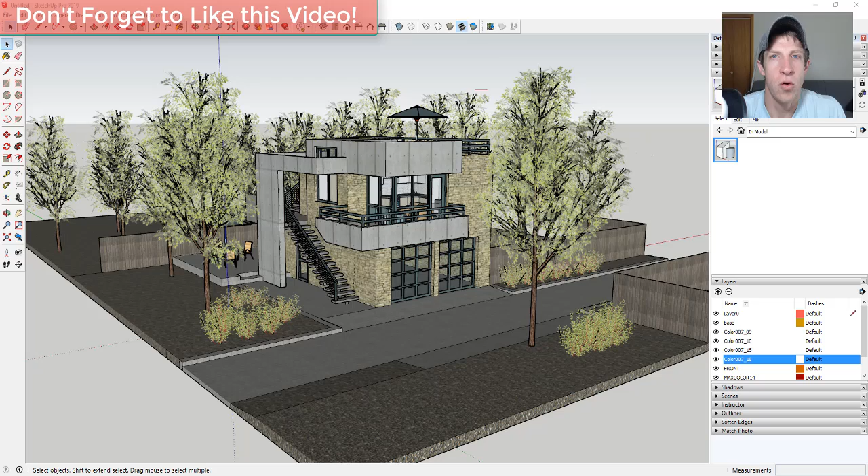In this video, I was going to take another model from the 3D Warehouse and take it over into Lumion to see what kind of rendering I could create with it in a short period of time. Let's jump into it. I found this model while doing another tutorial on my other channel, and I really liked the model and the model author and what he has in his collection.

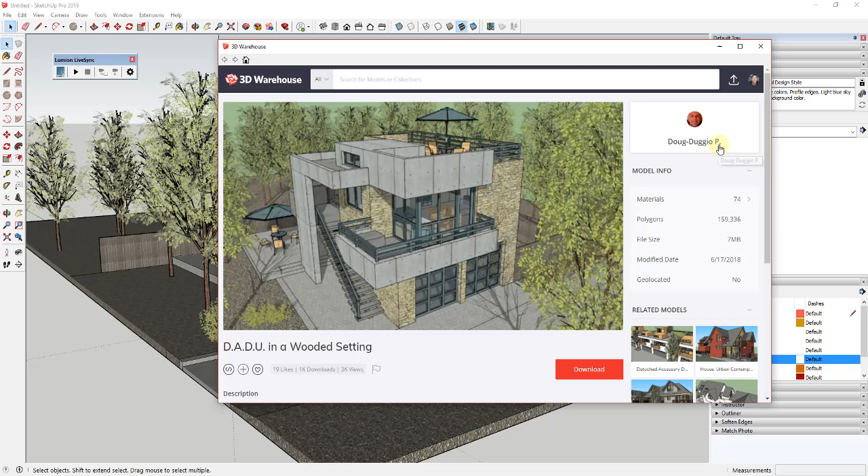All I've done is I've taken this model file, which is the DADU in a wooded setting by Doug-Duggio P. You can find that on the 3D Warehouse, and I've just brought it in as is. I thought we'd go ahead and take it into Lumion and see what we could do with it.

For now, I'm just going to use Lumion LiveSync in order to take this over there. Probably the first thing I'm going to do is turn on a faster style, or maybe just adjust this style with the profiles off so it's a little bit faster. That way flying around inside of SketchUp will be a little bit quicker. But we can go ahead for now and take this as is and send it over into Lumion.

I'm already seeing some things we're going to want to fix, but let's start by loading Lumion LiveSync, the extension, inside your model. I'll link to a video showing you how to get that. I'm just going to click the play button, and the first thing it's going to ask me to do is save my model. Once we've saved this model, we'll click the button for LiveSync.

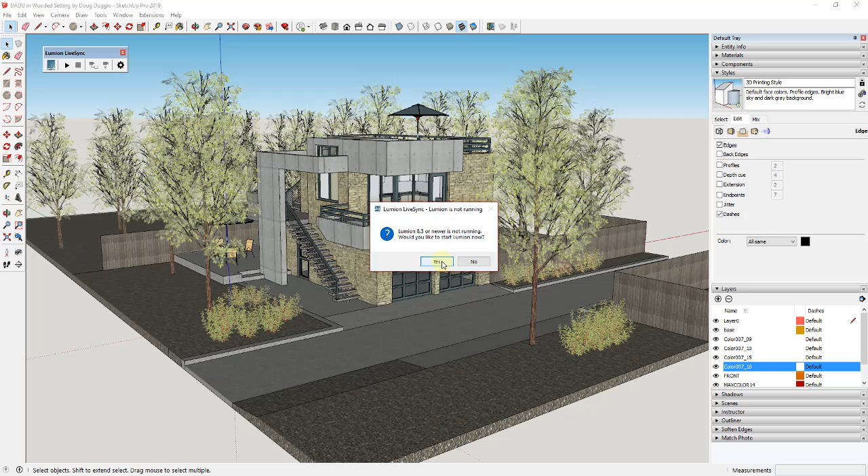Since Lumion's not running, it's going to ask if we want to start it, and we're going to say yes. I do get this question sometimes - if you do not have Lumion 8.3 or newer, you probably will not be compatible with LiveSync. But I'm just going to go ahead and click yes, and that's going to bring up Lumion.

The first thing we're going to do when this brings up Lumion is select a template file, which tells it what kind of background we want around this. I personally pretty much always pick the mountain range, just because I like having some mountains in the background as opposed to just a flat plane. You can select whichever one you want, but we'll click on mountain range for now, and that's going to load our mountain range background and load this model into our scene.

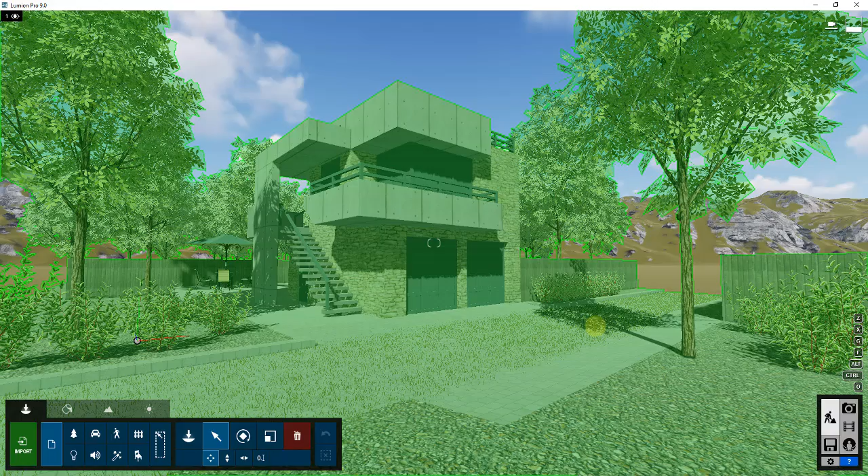So the model kind of gets dropped wherever - in this case, it got dropped over here, which is going to work just fine. When I go over here and look at this, you can see how this already looks pretty decent. There's obviously some things we need to fix and adjust, but that shouldn't be too hard to do.

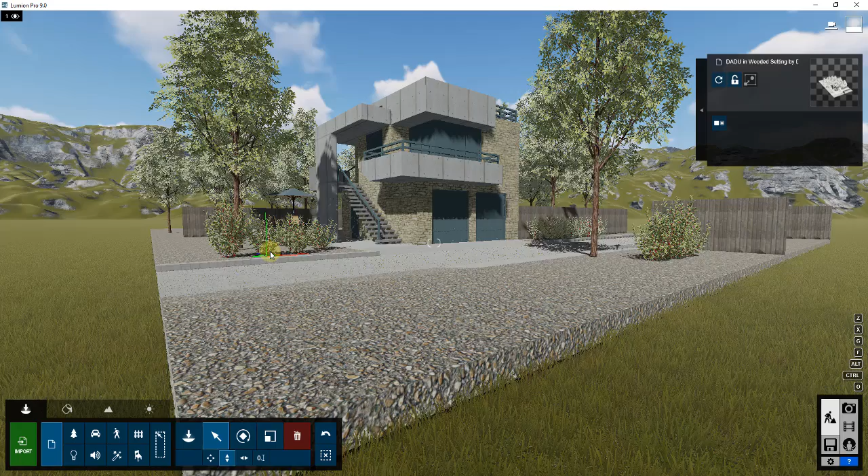One thing to note - it's not a problem in this one because there's a thick plane at the bottom, but some models, when you bring them in, you may need to move them up or down a little bit just to get them above the grass in here. In this case, we're not really worried about that - we'll come in and paint out this grass in just a second. Even the trees in this one actually look pretty good, which is kind of rare for a SketchUp model when you first bring it in.

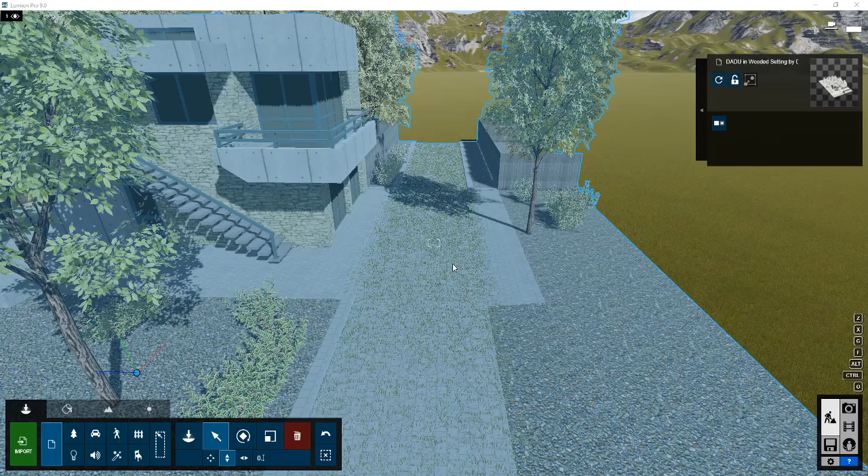What we want to do is start making some changes to make this look a little bit more realistic. The first thing I want to do is come into my landscape settings and paint out the grass that's showing up through this ground inside of Lumion. We obviously don't need the Lumion grass showing up through here.

So all we're going to do in order to get rid of that is go into the paint function, and we're just going to paint a material in this area where the grass is. We'll paint the rock material all along this face. You can see how that's really easy to do. You can adjust the brush speed and everything else, but basically what I'm doing is just painting out that grass material.

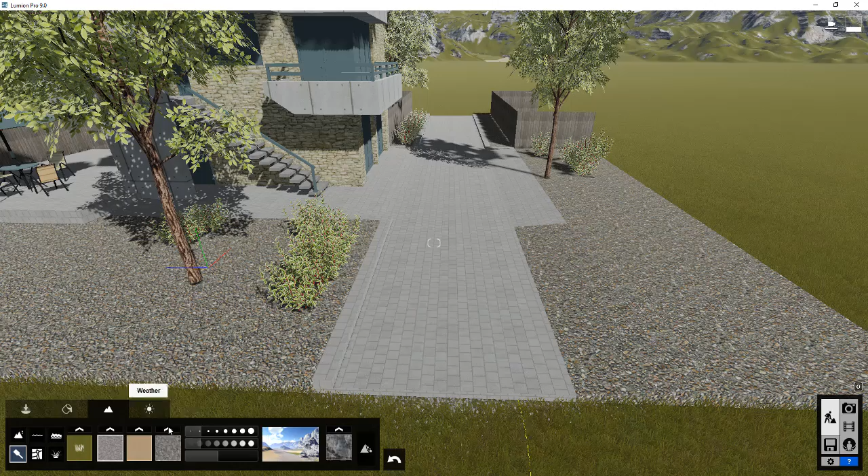If we were to hide our building, so if we take our building inside of SketchUp and Lumion and put it on a layer and turn it off, let's go ahead and do that. So if we select our building, place it on this layer, which is already on this layer, and turn that off, you can see how we just painted out a circle of material so our grass isn't showing through.

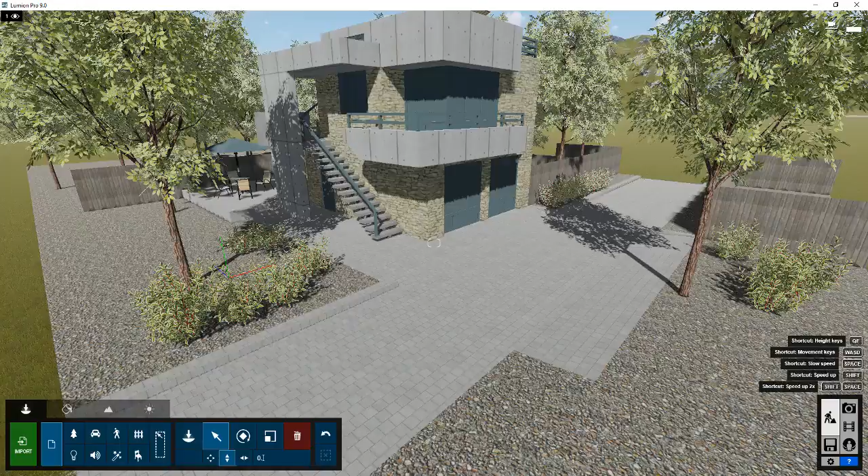And you can go back and adjust that as much as you want. So the next thing I'm going to do is fix some of these materials, because if you come in here and look at some of them, this is bringing in SketchUp materials and it's just kind of doing its best.

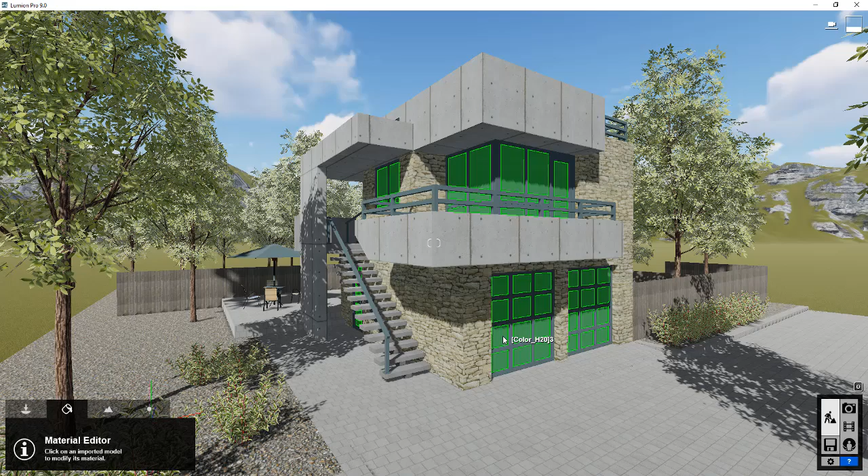But what we want is to use Lumion's better materials. So we're going to click on this materials tab and start swapping out all of these different materials for ones that are a little bit higher resolution. What I like about this model is there's already a pretty good separation of the different materials, so coming in here and adding these is going to be really easy. I'm going to start with this one right here.

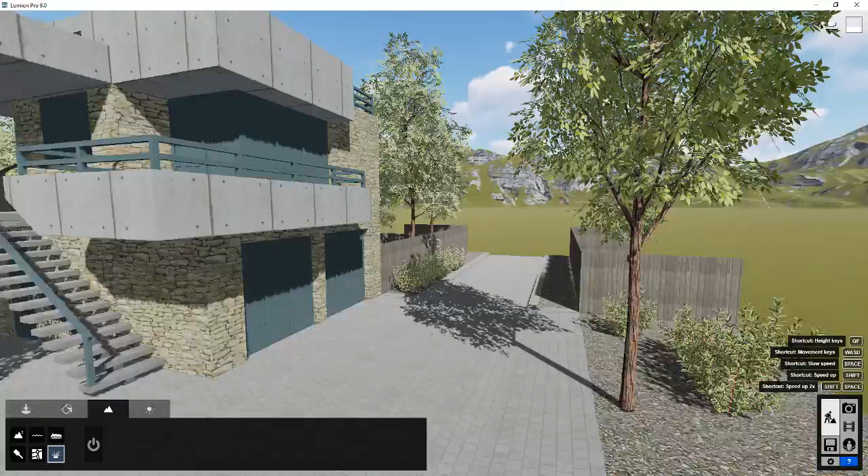Actually, the first thing I'm going to do, because my computer's heating up a little bit, is go into landscape and the grass, and just turn the grass off for right now, because it's trying to render all of the grass in the background. We don't really need that for our preview.

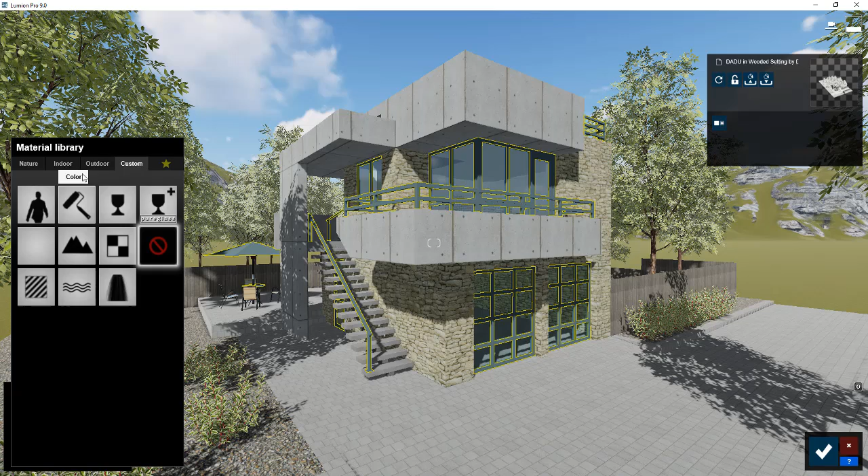Now I'm going to go into materials and just start swapping these out. A lot of the time what you can do is click on a material and then find something like an outdoor glass or a pure glass to use. You just want to swap these out for the better Lumion materials that are more realistic.

Like the stone, for example, I would go find a different stone material. There's a whole bunch of different materials in here you could use. You have to be careful because some of these look a little bit like pavers as opposed to actual stone, so you have to make sure you get something that actually looks good in your rendering. Like cobblestone obviously doesn't look good on a wall, but the stone wall material might look a little bit better. So maybe we'll pick something like this stone wall material for now.

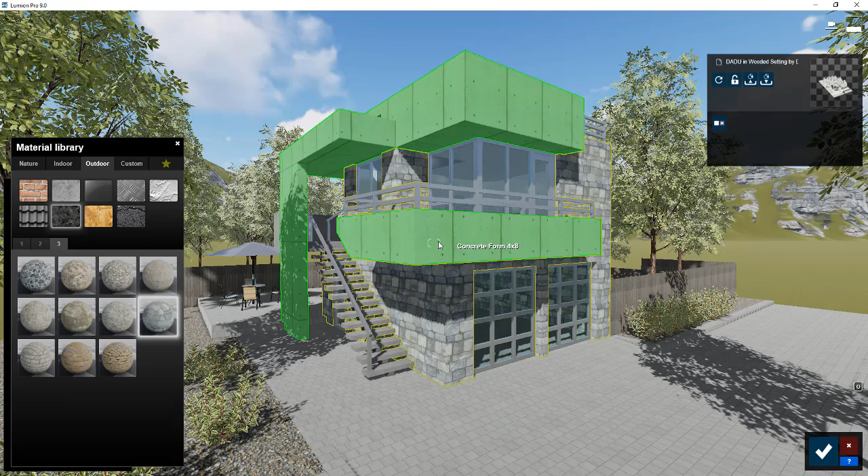So you can see I'm just swapping these out for materials that I like. I'm going to go through and replace some more materials, and then we'll come back in just a minute.

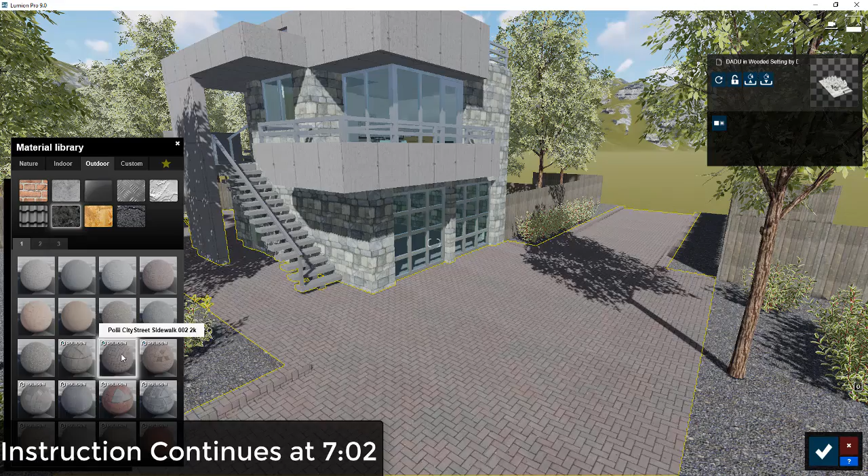Alright, so once we're done making changes on this material, we can click this check mark to save those changes. One thing I may have to go looking for, because I'm not sure there's anything in the Lumion library for this, is I probably want to swap out this fencing weathered material for something else, but I couldn't find a fencing material.

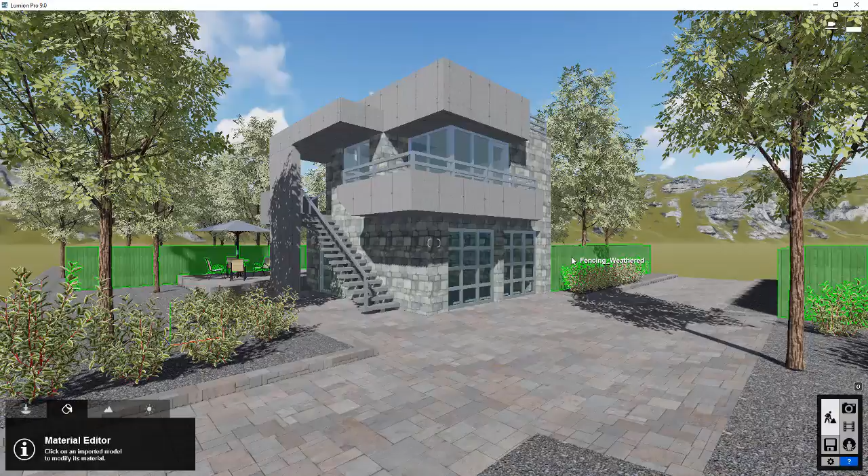The next thing I want to do is, right now these trees actually look pretty good. I'm really impressed with how good these trees look, but we're still going to get a better look in here by taking those trees and replacing them with Lumion trees.

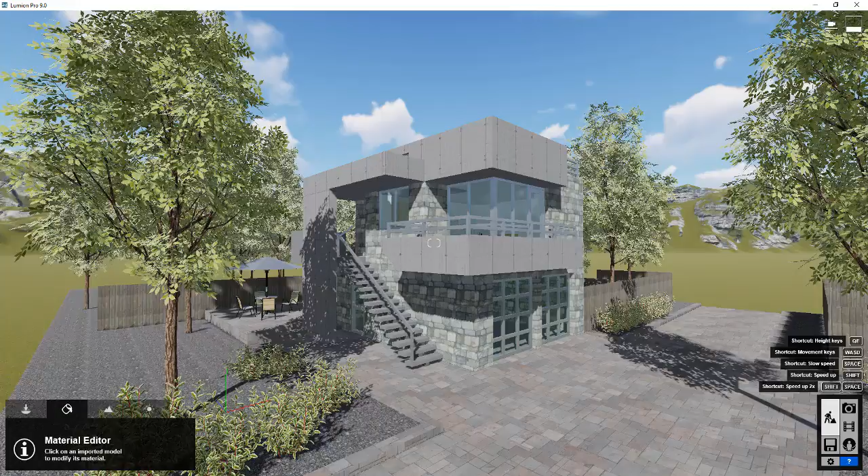So what I want to do is use the power of LiveSync in order to turn those off. We don't need to delete them, but we need to go back into our SketchUp model and find all of those trees and maybe put them on a layer.

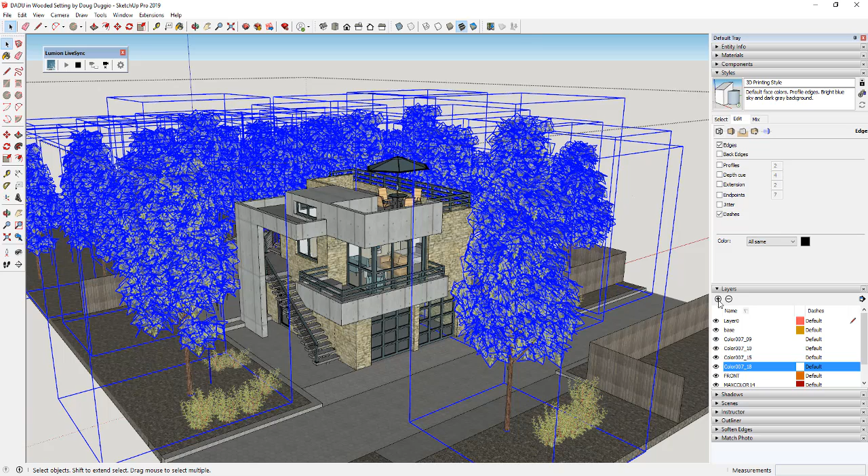So what I'm going to do here is just select all of those trees. I'm going to drag a box across these right here, and I may just take all of them and put them in a group, and then add a layer for trees in SketchUp.

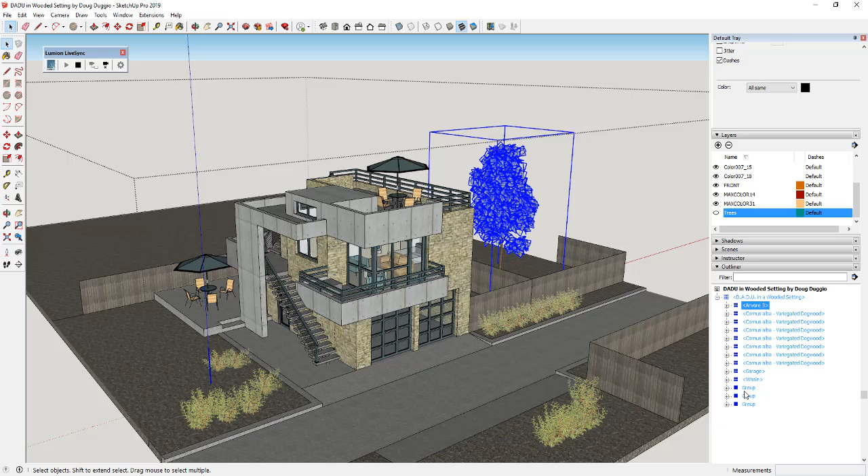I'm going to put this group of trees on that layer and turn the layer off. This tree should be in that group, so I'm going to use the outliner to drag it into that group. I'll turn that layer back on for a second, then drag that into this group. I have tutorials on the outliner on my other channel if that's something you're interested in. That's a really great way to keep your model organized.

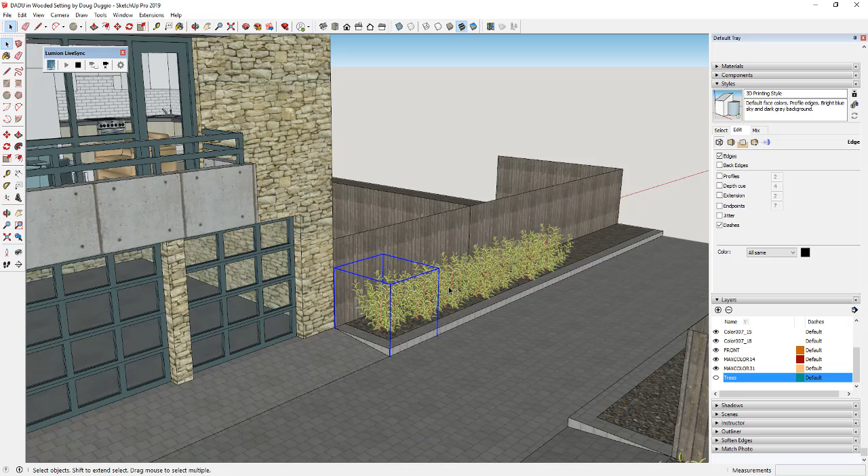We're going to come in here and turn these trees off, and do the same thing for these bushes, though I am really impressed with how good those bushes looked as well. These are actually really great plants, but pretty much all the time Lumion stuff is going to be better.

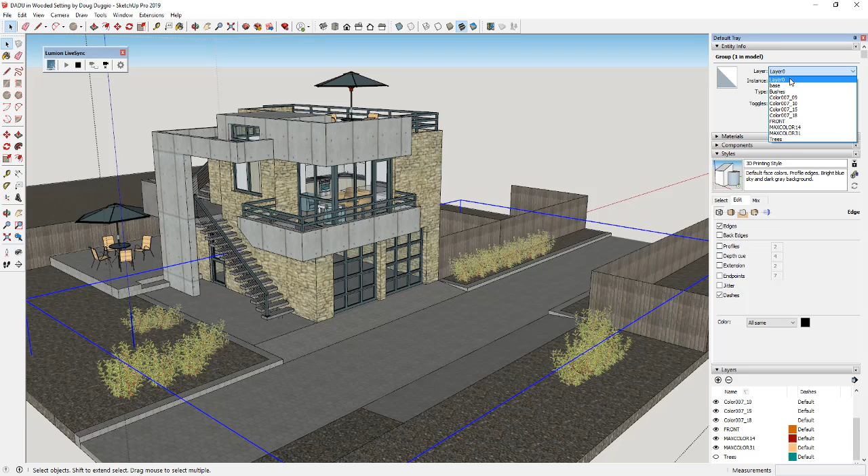So we're just going to take all these bushes, put them in a group, make a layer called bushes, put them on the bushes layer, and we'll turn those off as well.

One of the nice things about this, and I'm going to go ahead and turn off camera synchronization—I don't really want that inside of Lumion. But one of the nice things about this is now if I go over into Lumion, you can see how all of those have been turned off.

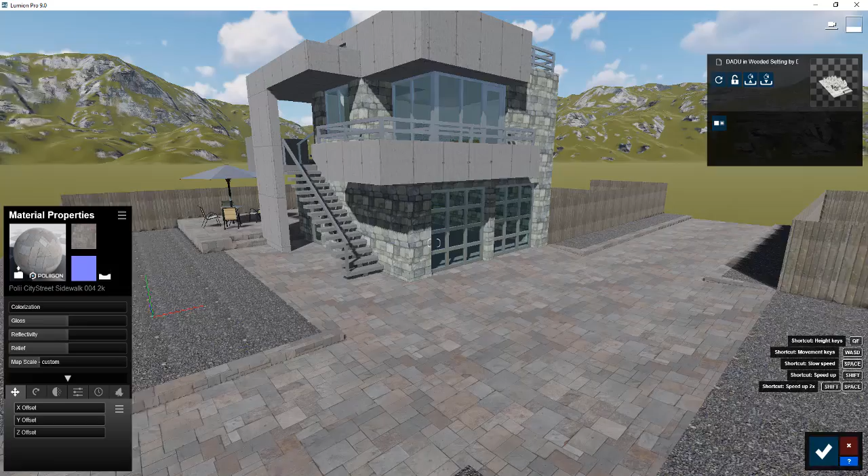The great thing about that is those are still in my SketchUp model. So if I want to show my SketchUp model off, I can definitely do that. But we don't necessarily want them to show up in Lumion. So with LiveSync enabled, it's really easy to just flip all of those off until we need them in SketchUp.

Now we're going to get out of material mode, go into object mode, and start placing some trees. Because this is more of a residential setting, the trees in this case are probably going to be a little bit more uniform, which actually works pretty well for us.

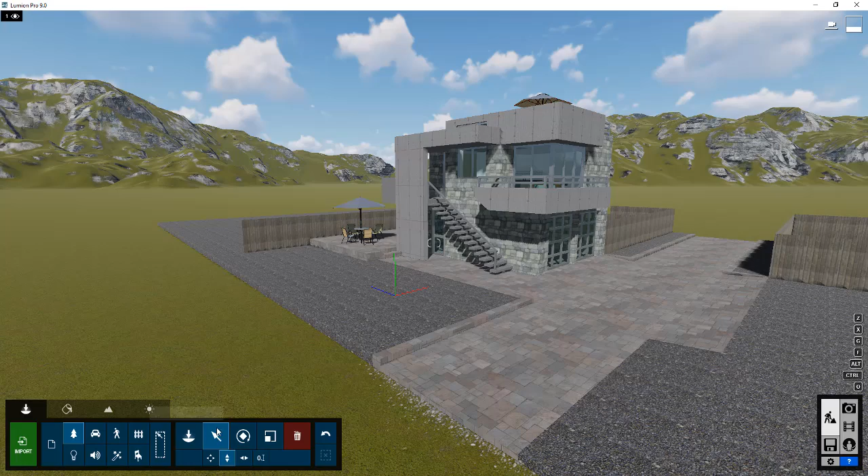We're just going to use the mass placement tool in order to drop a few trees in. So we click on objects, nature, and then click the place button. I'm going to go ahead and turn on mass placement because I'm going to place multiple different trees in here, and I'm just going to find some trees that I like.

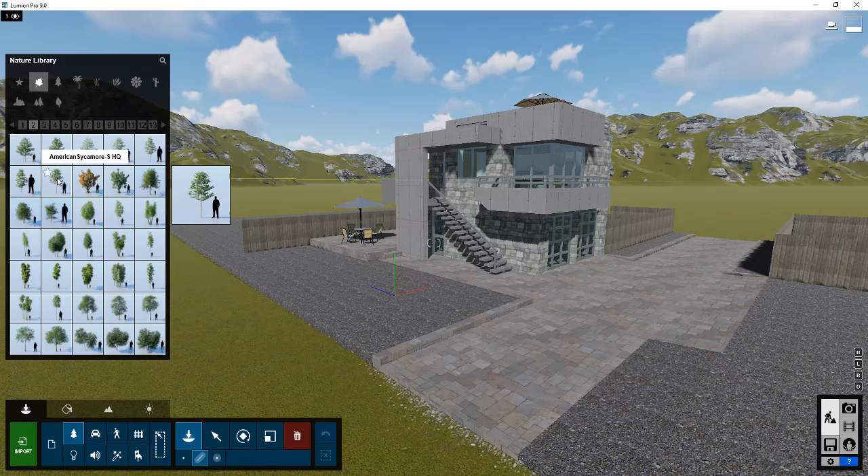The nice thing about these is with these sycamores, you can see what size they are. For example, over here I want some smaller trees, but over here I'm going to want some bigger trees. So I'm just going to use the mass place tool to drop a few of these trees in here.

You can adjust the number of trees that go in here, and you can randomize the direction of the trees if you want to. You could even add another kind of tree—so maybe if you wanted a short tree in here as well, you could click on this and then click add, and that'll randomize what trees it places in here.

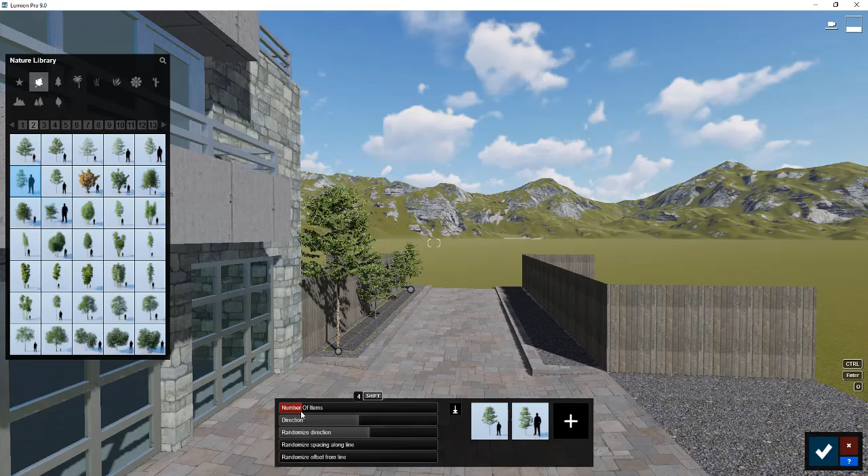You can see how just by dragging this, it's randomizing the number of trees and the kind of trees that it drops in here. For this one, I kind of like this—maybe I would like a little bit more uniformity, but that's okay. So we're just going to go ahead and click the confirm button.

Then we're going to do the same thing over here—just drop some random trees in and click OK. Now over here, I want to bring in some bigger trees, maybe like these larger American sycamores or something like that. You can see how those are a little bit bigger, and I want to drop a few of those in here. Again, they're going to be kind of uniform.

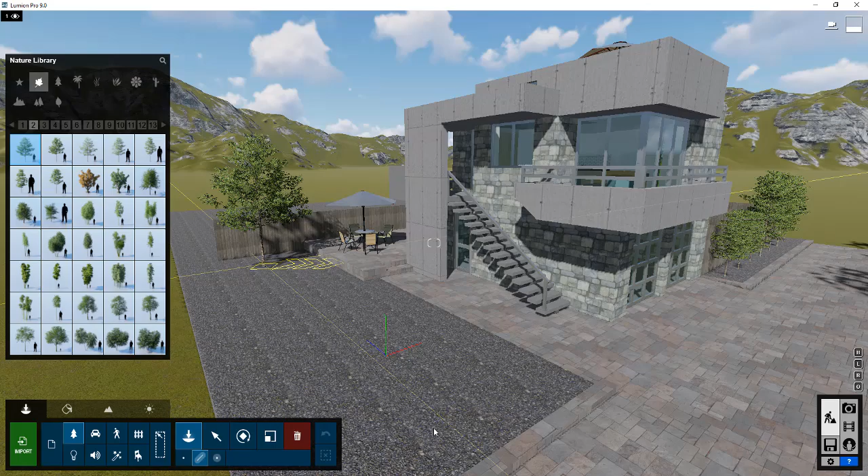So we're just going to use mass placement. We'll single click, and then single click over here in order to give this a line. And I'm going to get rid of the smaller trees in here and just use these bigger ones.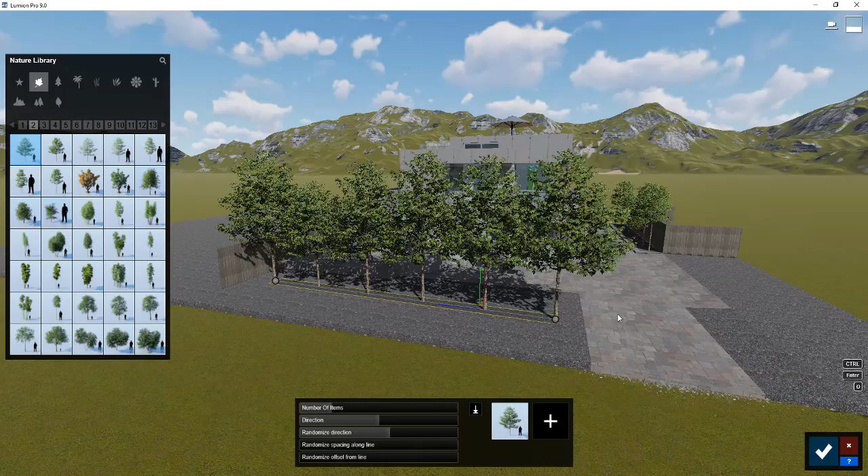So you can see how this is kind of randomizing the direction. I can adjust the number of trees in here with this slider. I don't really want the offset to be randomized, so we'll do a little bit of that back here. We're just going to leave this as is.

And then we may do the same thing over here, using mass place to place some more trees. I'm actually going to call that good. So what that gives us is this great view with the trees in here.

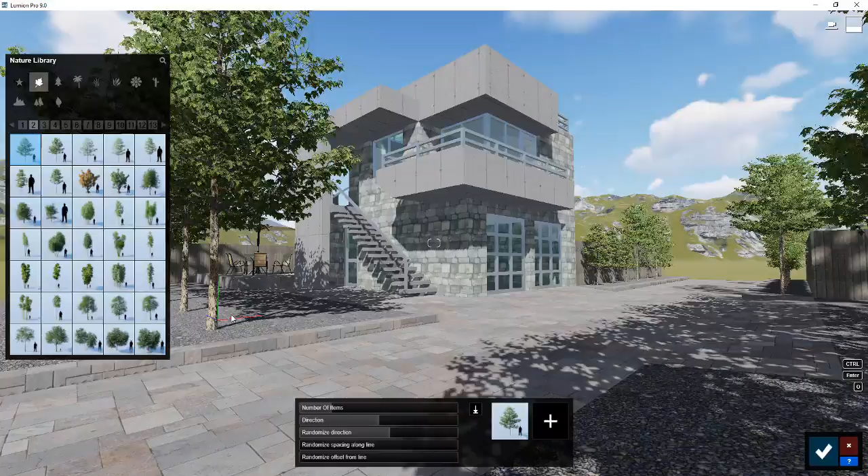And we may come in here and spread some other objects in a minute. But what I want to do now is, back here, create some bigger trees that are just kind of random to fill in the background, because right now this is just a random open space.

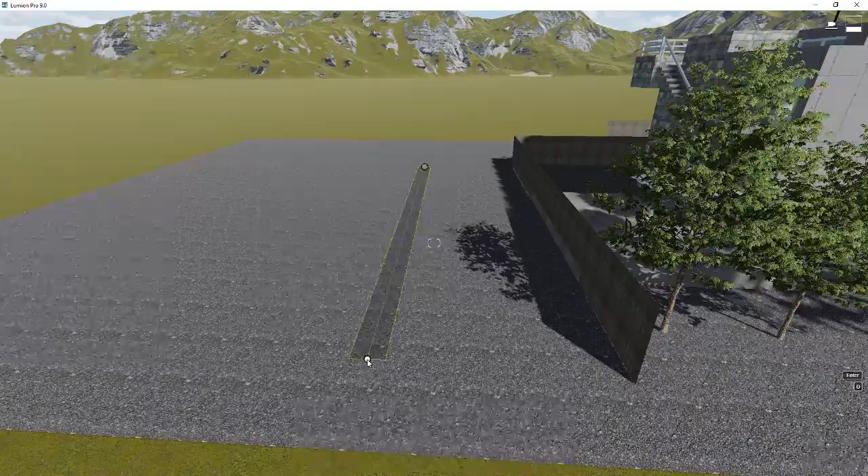So for this one, we're going to confirm that last one. We're just going to do the same thing where we draw a line across here with the mass place tool. But in this case we want to randomize our spacing a little bit, and we also want to randomize our offset. You can see how when we randomize our offset, the outline of that shape shows us exactly where that area is that those trees are going to get placed.

And I'm going to drop in a couple different sizes and types of trees in here just to get us a little bit more randomness. Then I'm also going to increase the number of items, so you can see how I can add and place more trees just by dragging that slider. And if you don't like where it places these, you can just drag it up and down again, and it'll re-randomize where those trees are. I'm going to go ahead and click confirm.

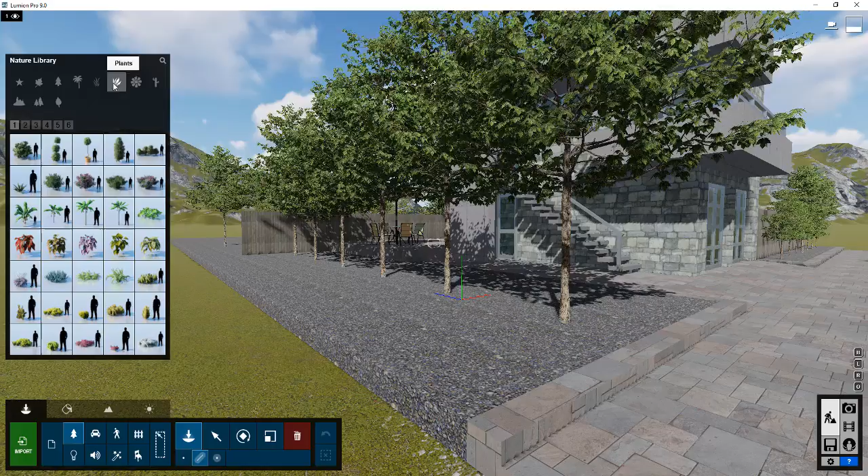And so the other thing you might think about is putting some things in these beds, because they look a little bit empty. So we might think about dropping some plants or some bushes in there, maybe some of these green bushes, or if we have some more realistic bushes, maybe we'll use those, just something to fill it in and make it look a little bit less empty.

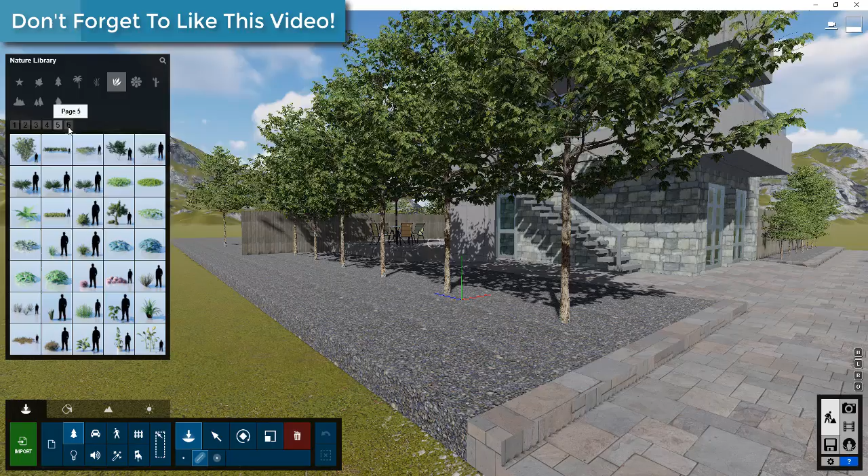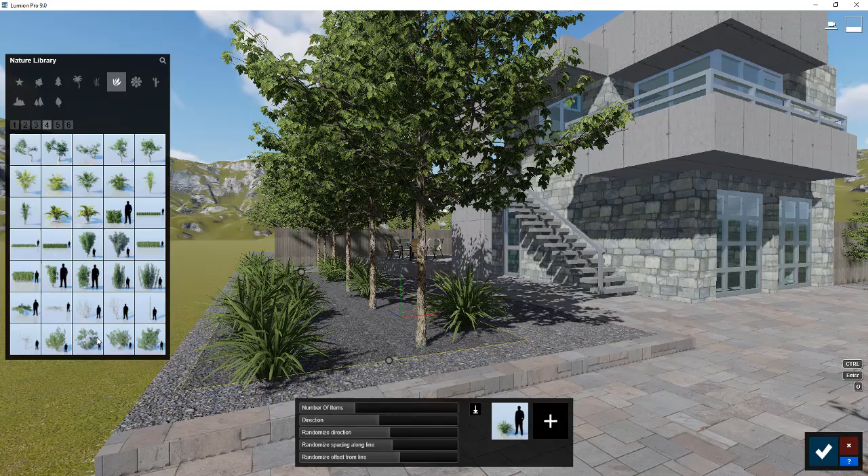So maybe just some little bushes in here, and we're going to have to remove all of these objects that aren't the trees, but maybe some bushes like this. We'll still randomize the spacing, but maybe not so much as we had before, though we'll add a couple different kinds. You have to be a little bit careful to get the same kinds of plants in here, or at least enough that it doesn't look weird that you've got one kind of plant and not another.

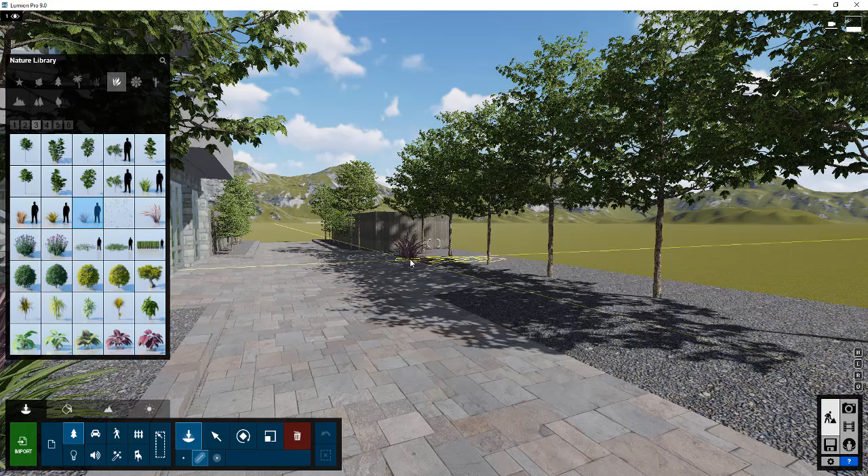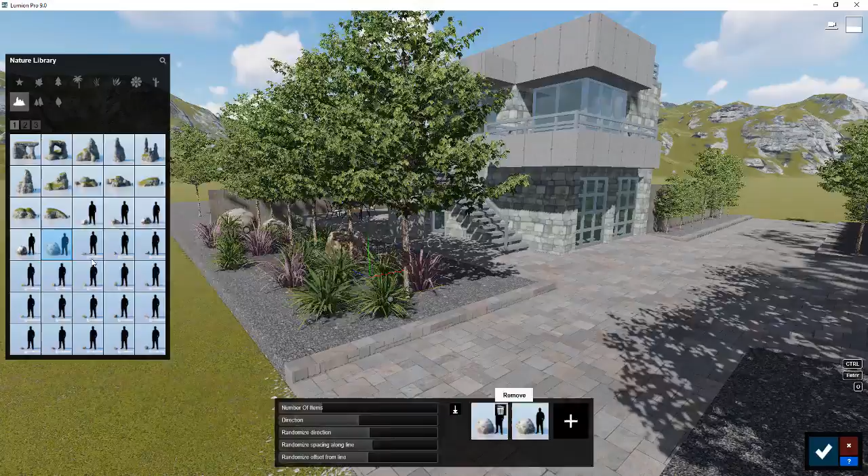But we can maybe drop some plants in here. The other thing you might think about doing, I'm going to go ahead and drop some plants over here as well real quick, making sure none of those are showing up on my line. Then you might also drop some rocks or something like that just to break this up, maybe something like that to increase the planting in here. So I think that puts us in pretty good shape.

The other thing I might do is add like a car or something out here, maybe like an SUV, one of these vehicles, just something sitting out here. And that car is looking a little bit big based on what I'm seeing here, and that may have more to do with my model than the car.

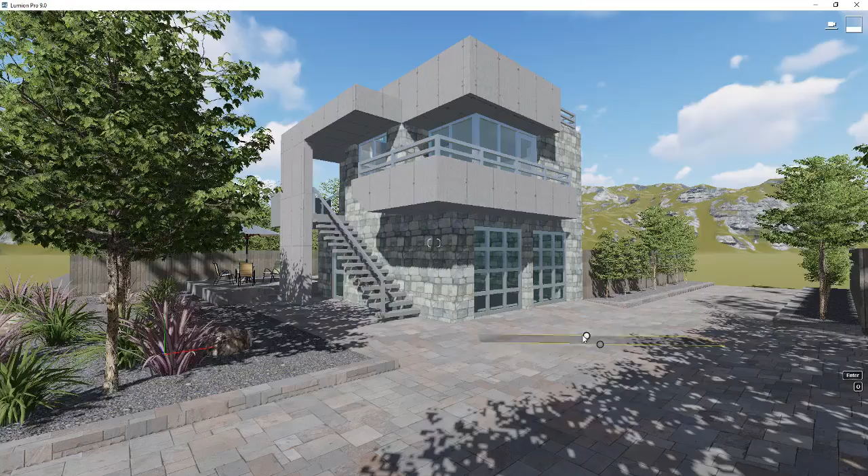We'll go ahead and cheat a little bit - no, I don't want to mass place that, we're just going to put a single placement here. And in this case we're just going to cheat a little bit and scale that down, so maybe something like this. So you might put a car in here, maybe adjust the rotation a little bit.

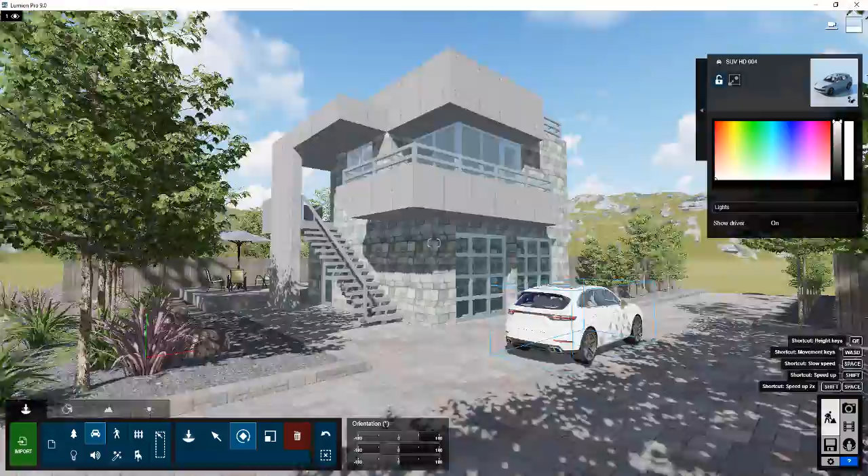Something like that, just to add a little realism in here. The other thing you may want to consider is going back in SketchUp and adding a road coming down here, maybe having it turn a corner or something so you don't just have a road that's ending like this.

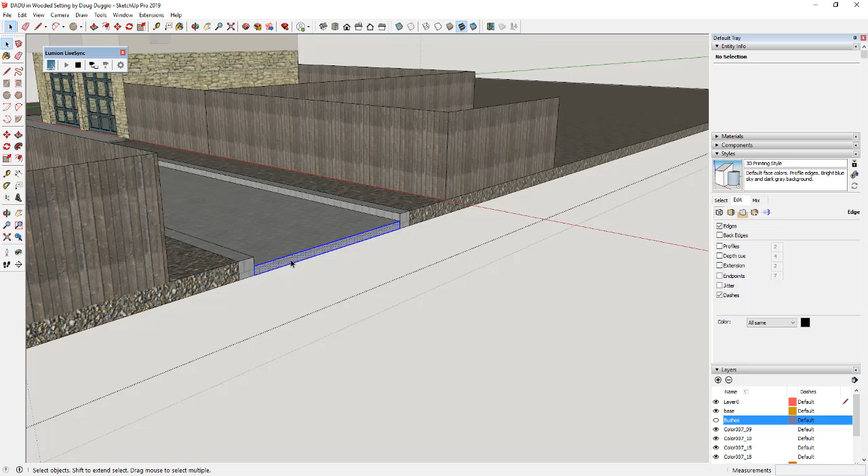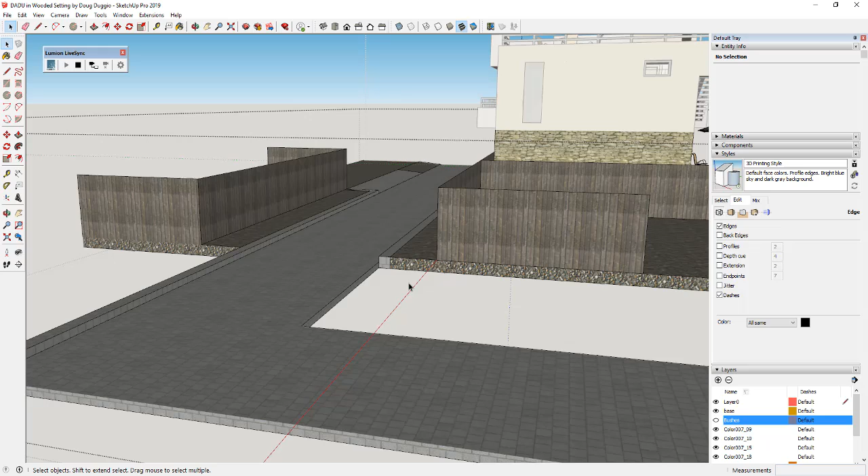With LiveSync, that's really easy. I could just come in here, take this, and pull our road out a little ways. Same thing over here. This road's 12 feet wide, so we'll draw a 12-foot line here to split this up, and then extend this out this way. So we're just going to take this...

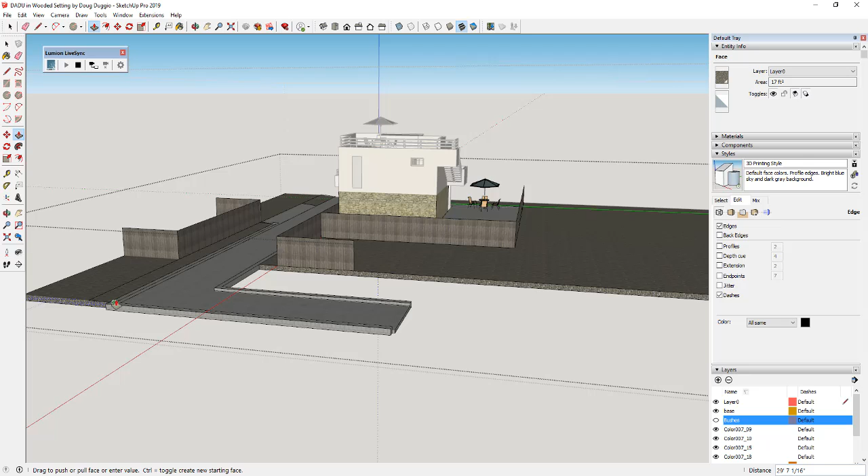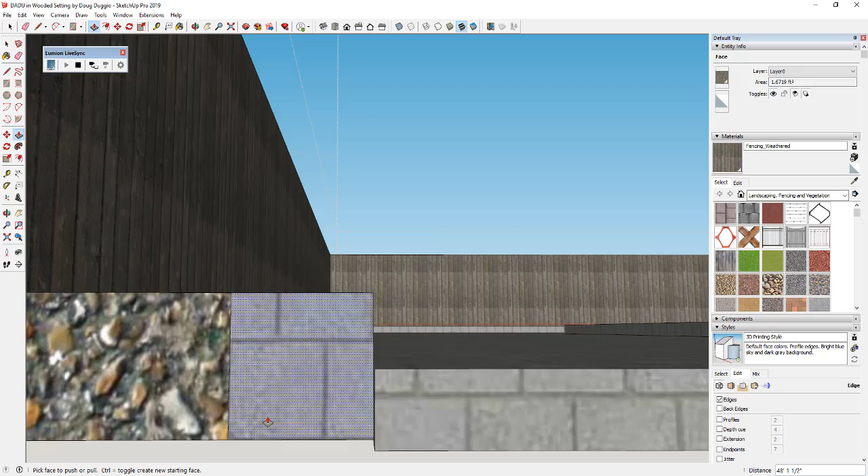And we'll just extend our road down here. And we might take our fencing and extend that as well. We may just kind of extend the whole thing, just enough so that we can block this whole thing off. And we'll just take this material and apply it right here. Push-pull this little piece like this. Really what we're doing is just creating something where you're not looking off into the distance with just a horizon showing up.

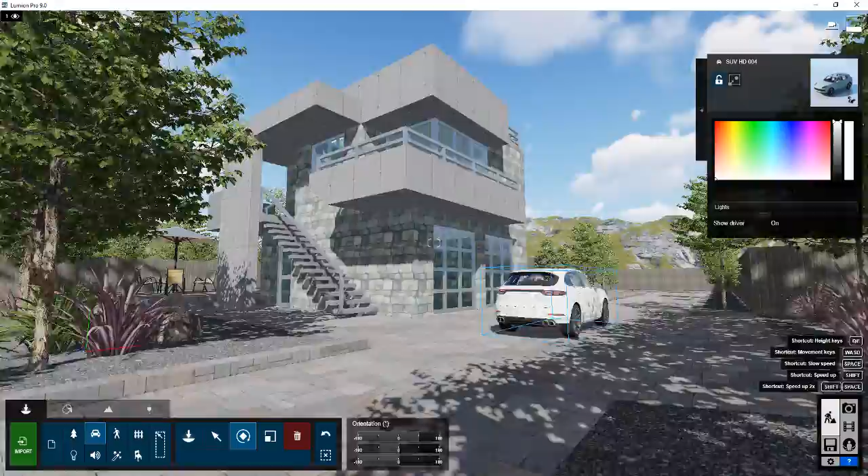So if you go back to Lumion, you can see how now you've got a fence down here where your road turns the corner, and this looks a lot more realistic. That puts us in pretty good shape. So probably what I'm going to do is go ahead and create a rendering with it.

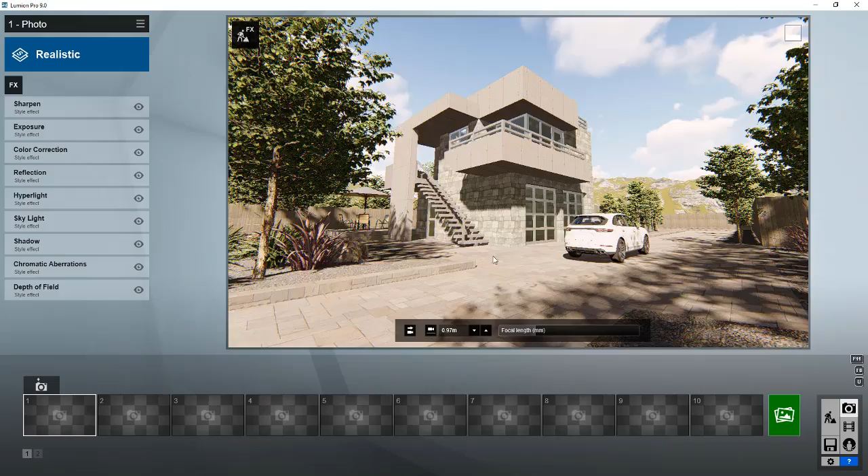So I'm just going to take this view right here and we're going to go into photo mode. When I go into photo mode, the first thing we're going to do is import a preset, or a style. You can go in here and select a style like this realistic style. That's always a pretty good place to start, and then you can build on top of it.

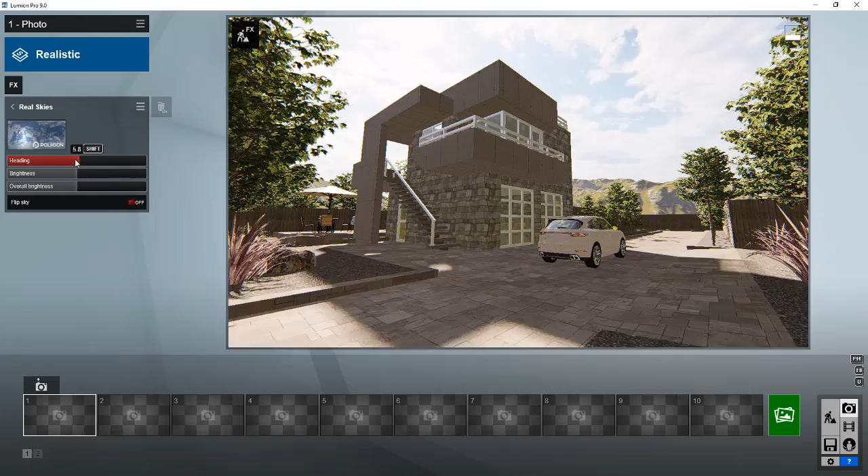Almost always with this new version of Lumion, I come in here and add a real sky, because you can see how those real skies really make a difference when it comes to the lighting in your model. They're really excellent HDRI files, and each one creates a different look and different lighting, but they let you create some really awesome things in here. If you wanted more of a cloudy day, you could select a cloudy file or something like that—it's up to you. With something overcast, you don't really get the shadows. So that's kind of up to you, what you want to create with this.

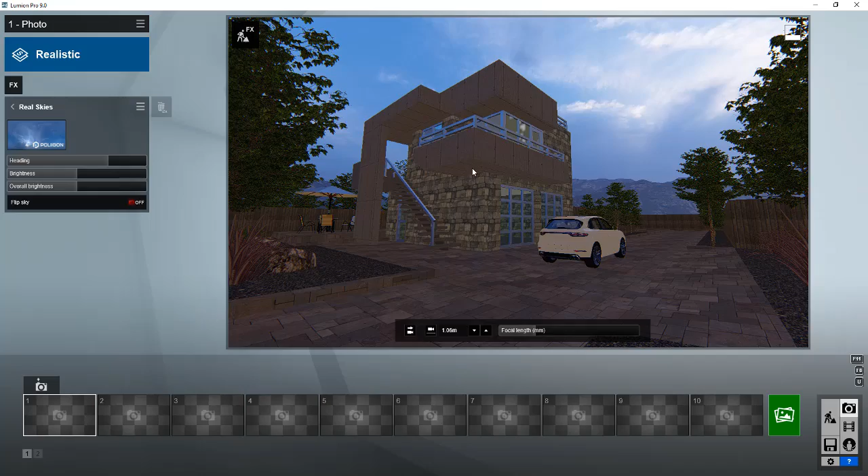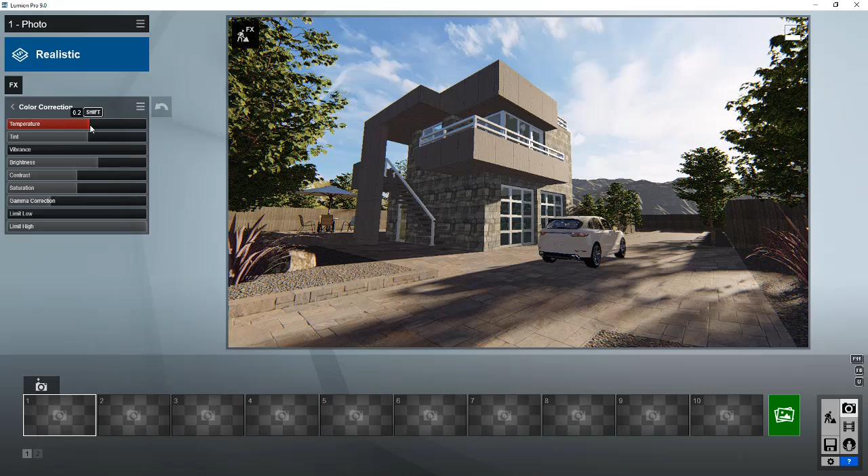You could even create an evening view and add some lights in here. We'll just go with this first one. The other thing I like to do, and you don't have to, is go into the color correction and turn the color temperature down a little bit. I feel like when you're up at like 3 or 4, this all just feels very yellow to me, and I like it with more of the blues, but that's a personal preference kind of thing.

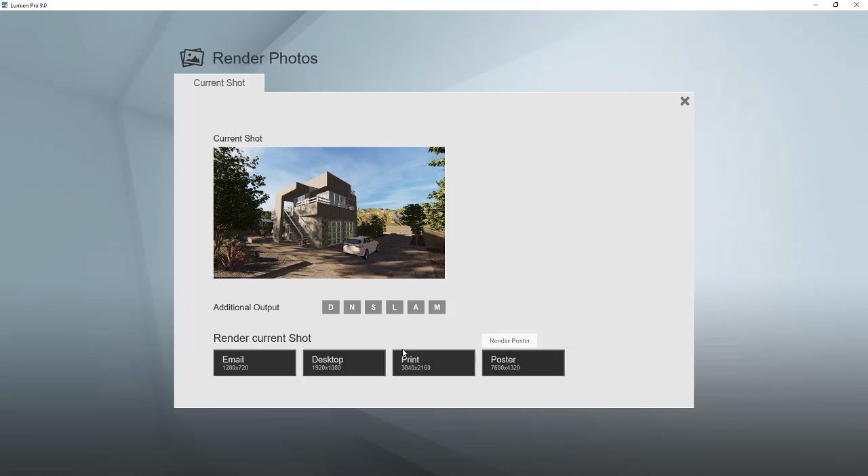Once you've created this and got it the way you want it, you can do a lot of trial and error in here. The first thing you do doesn't necessarily have to be right—that's the nice thing about Lumion, how fast this is. But I'm just going to take this image and click the button for render photo, render it to a desktop resolution, and save this—we can just call it test image 1, or you can be more specific if you want to.

We're going to go ahead and let this render, and you can see how just by bringing in this image or model and replacing a couple textures and adding a couple models in here, you get this really realistic house rendering without having to do a whole lot of extra modeling work or anything like that.